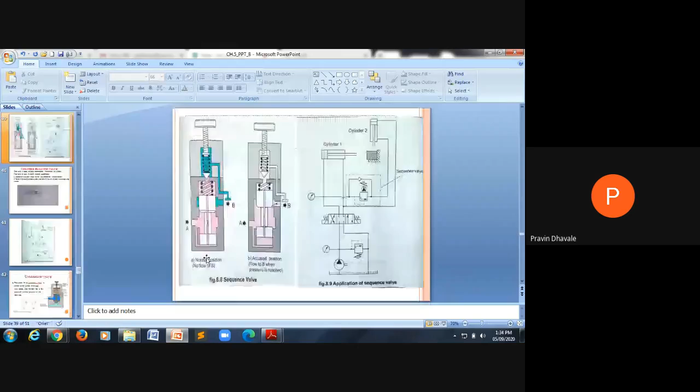We will start with the remaining part of our chapter, that is the flow control valve. In last lecture, I think we have covered the pressure control valve, right? Am I audible?

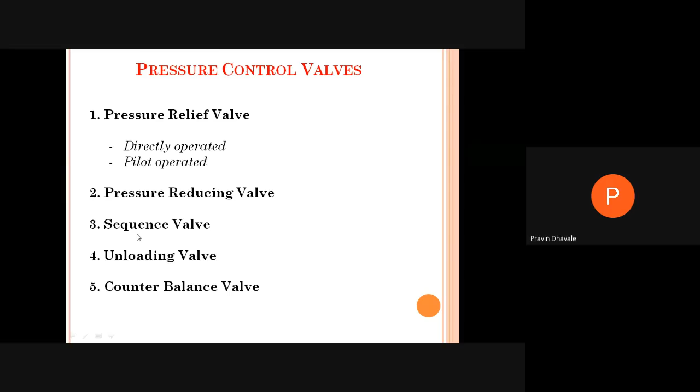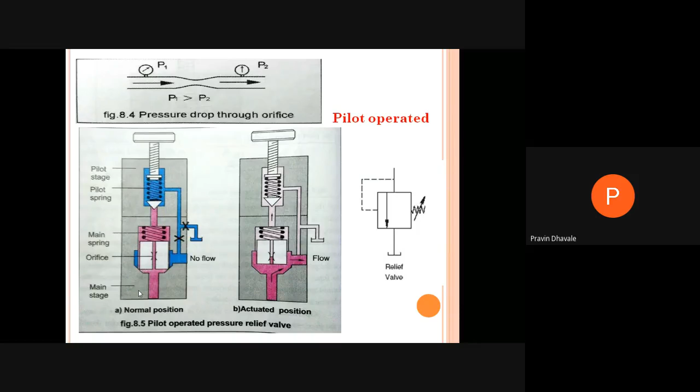In pressure control valve, we studied different types of the pressure relief valve. It may be directly operated and pilot operated. Pressure reducing valve, sequencing valve, unloading valve, and counterbalance valve. This is the pressure relief valve. It is always in closed position. It limits the pressure of the overall system.

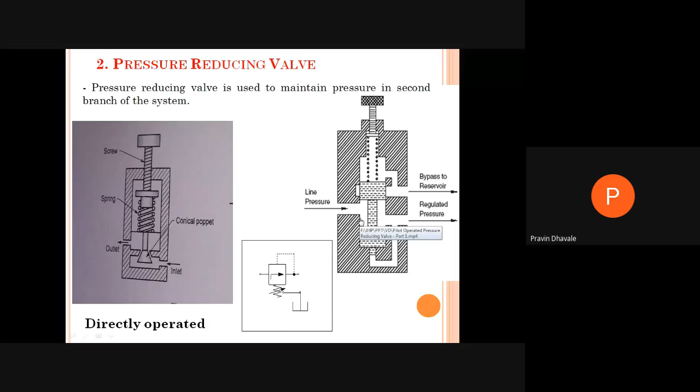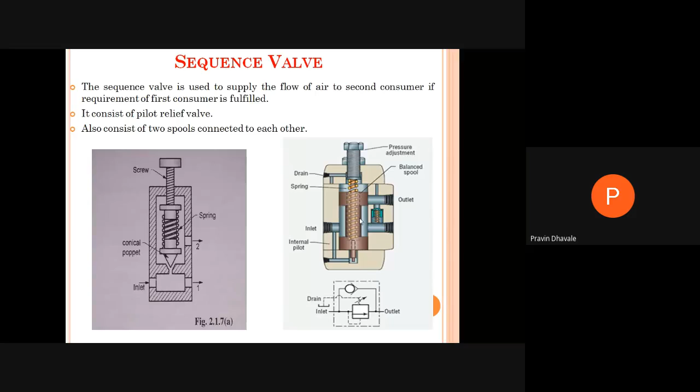This is the diagram of pilot operated. This dotted line shows the pilot signal sensation. Then pressure reducing valve, to maintain the pressure in another or second branch of the system. It is always in open position. Then sequence valve, it will help to carry out the different pneumatic operations in a pneumatic circuit with a proper sequence, with due care that when one operation is completed, after that the second operation is started.

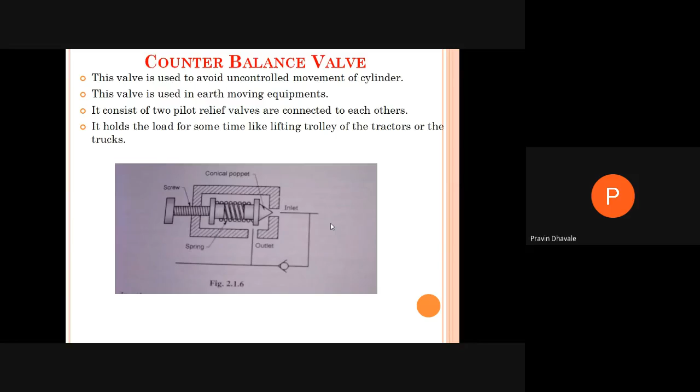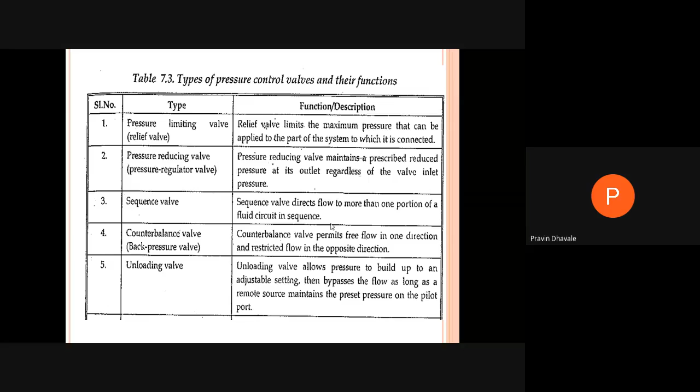Counterbalance valve, it will be used to hold the load for some time, like a lifting trolley, right? Unloading valve acts like a relief valve. Then we saw the different types of the valve with their function. This chart gives insight regarding the functions of different pressure control valves. Now, one short part is remaining from the pneumatic control valves. Up till now we have covered direction control valve, then pressure control valve, now flow control valve, right?

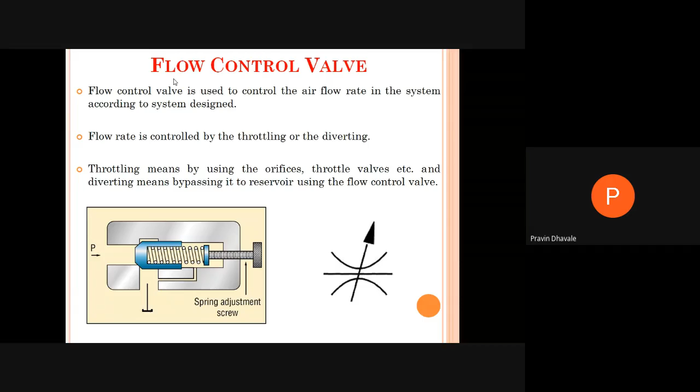Now, the type of the flow control valve is the non-compensated flow control valve. Is the screen visible? Yes, sir. Okay. In a non-compensated flow control valve, we cannot make parameters like pressure constant. We cannot make the pressure constant, velocity constant, or flow rate constant.

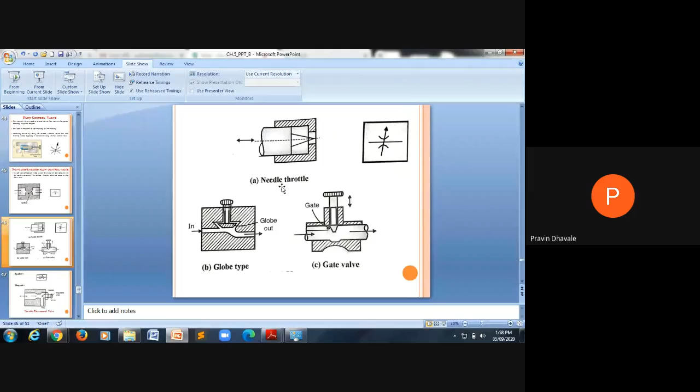This is the diagram. There are certain types of non-compensated flow control valve. There we may use the needle throttle type valve, globe valve, gate valve.

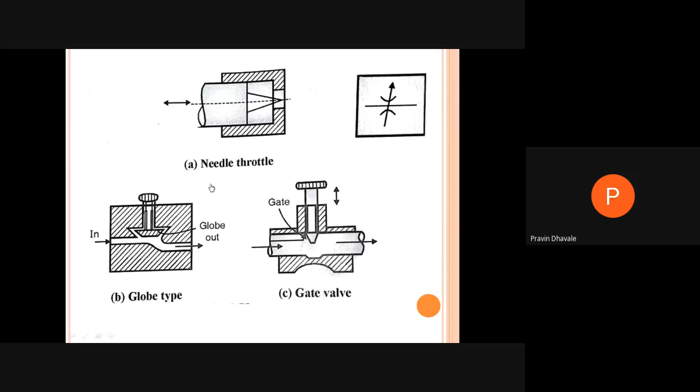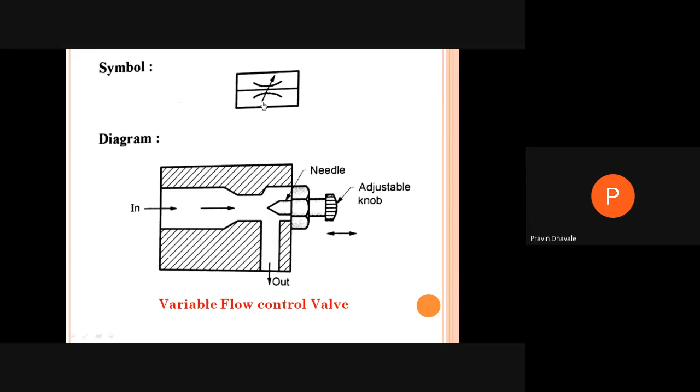Is it over? Is it over?

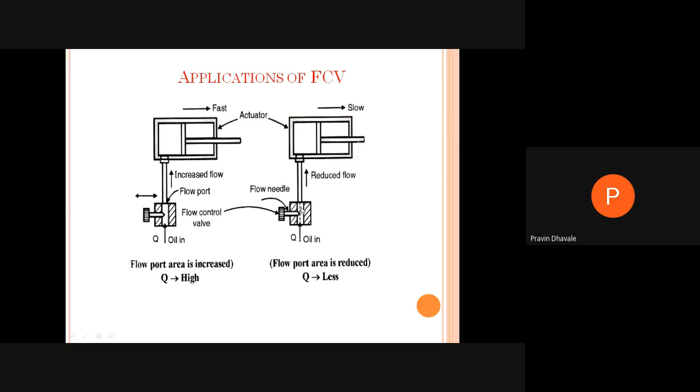Now next is the pressure temperature compensated flow control valve. Here